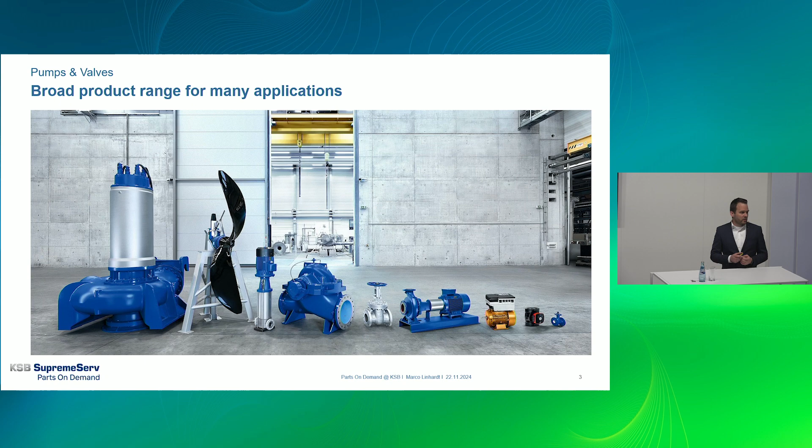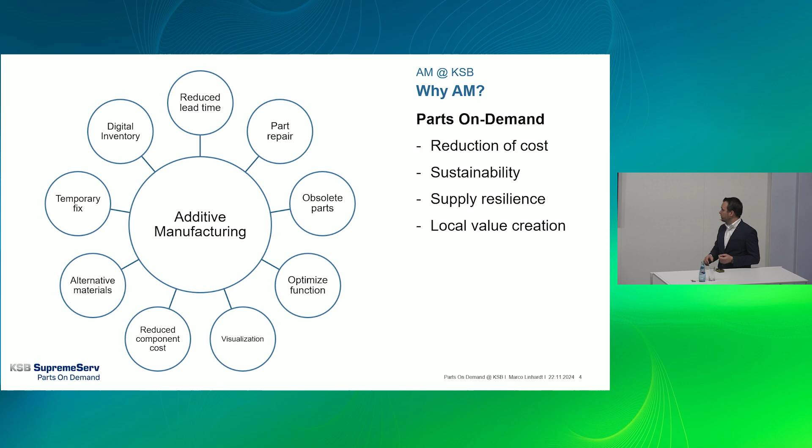We also have a foundry, and in the foundry we have a division for additive manufacturing. What we do is additive manufacturing. Of course we started like everybody else with printing prototypes and spare parts, but additive has so much more potential, like optimizing your parts and products, or even designing parts that could only be done additively to improve your products. I will guide you through some examples we did in the recent weeks.

That's us. We have more than 20 years experience in powder bed fusion. Right now we have five machines: 2 EOS M400-4, 3 M290s from EOS, one with a kilowatt N-Light system and one with a kilowatt big spot system. We started with printing in 316L, but then switched to nickel base alloys like Inconel 625, 718, alloy 59, and so on. We have been the first company worldwide qualified for printing pressure containing parts, and also did the DNV certification for Inconel 625, level 3 for impellers, but are planning to extend the material range as well. Just as a rough estimation, we worked on 8 tons of powder last year.

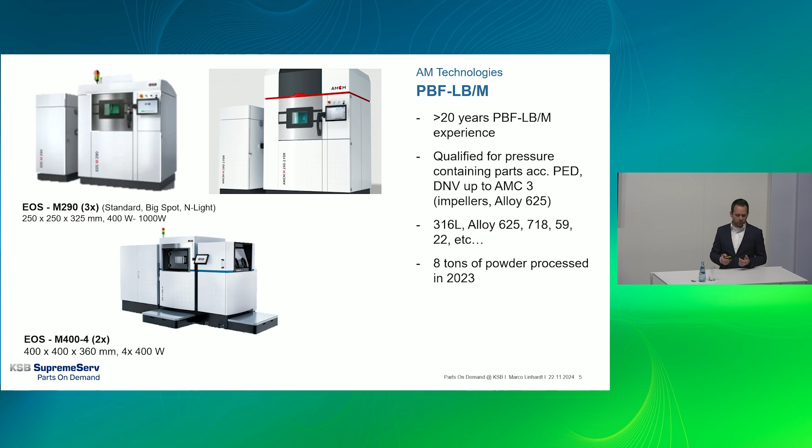This is one of the examples we printed recently, so the topic is obsolete parts. We have a lot of pumps in the field. This is an RPH pump used in the oil and gas business, from 1982, so a very old part, but it's still operating, everybody's happy, but they need a spare part.

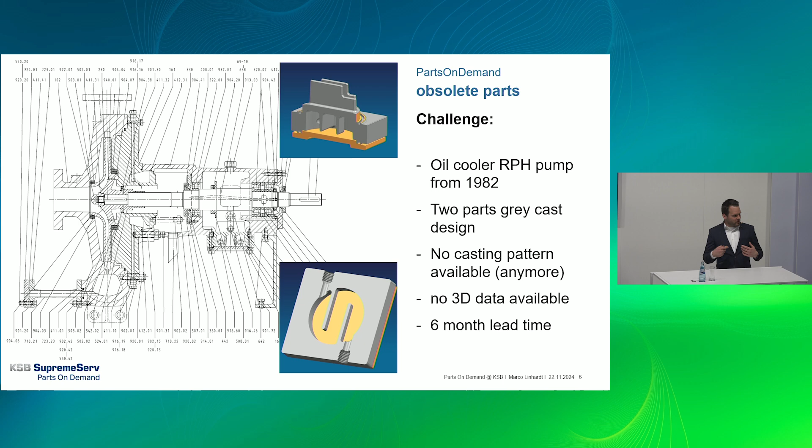The customer asks for an oil cooler that sits in the bearing and cools the oil lubricating the bearings. This formerly was done by casting, 2 parts made from gray cast, and the customer got an offer for the new part with 6 months lead time, which he could not accept. So they asked, can you reduce delivery time please? And as usual, topics like this end up in our department, and we said okay, yes, we could print that cast design, or perhaps we could improve it.

Honestly speaking this is not top-notch engineering, rocket science stuff, but as you can see, we reduced the weight from 8 to nearly 2 kilograms, improved the cooling performance because we have now more surface, we have a wake-free design, so no room for fouling. It's made from 316L because we cannot print gray cast, so that's an upgrade as well.

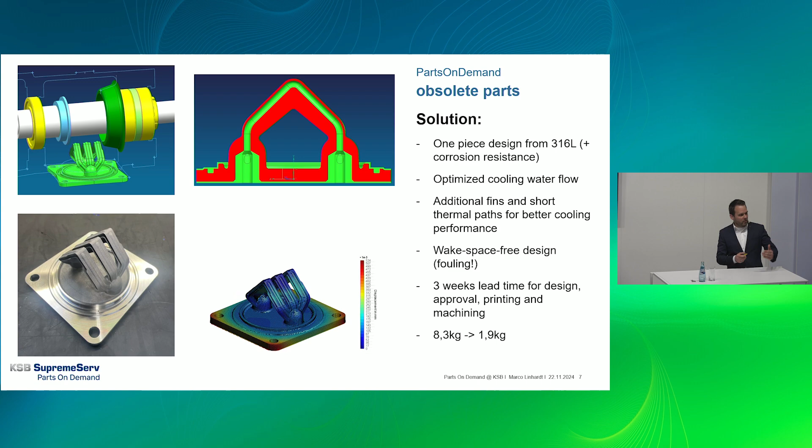The customer was very happy because within 3 weeks we did the clarification, did the redesign, and delivered the part. Of course you could have done more, but a friend of Pareto - 80% success with 20% effort. I think that's a cool example of what you can do with additive - not only deliver the part faster, but also give it some advantage.

Another challenge, just a few weeks ago, was a critical timeline for an impeller. The nuclear power plant in Phillipsburg had a problem with wastewater treatment, and they needed a set of impellers - 2 of them. This was sourced from an external foundry, and when it came to our warehouse, we had to decline the cast because the quality was worse.

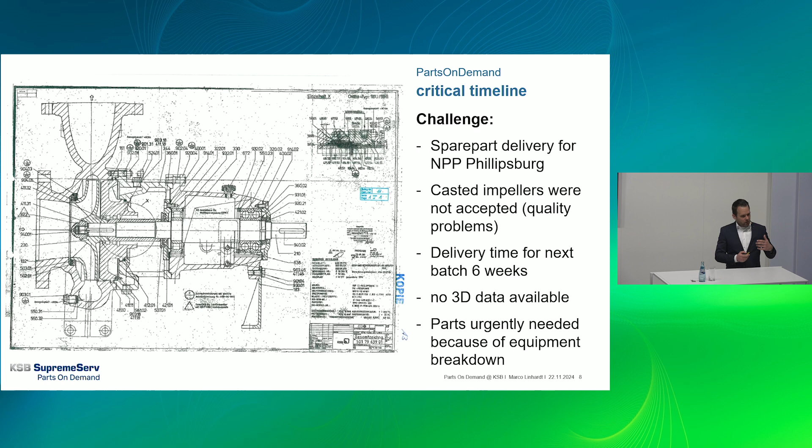The customer got very upset, and the next delivery slot for casting was just too far away. So again they asked, what can you offer? We started - okay, this was a very strange stainless steel material which we cannot print, but we offered: perhaps Inconel 625 does the trick for you. Then we started discussions with the guys from the nuclear power plant, with the TÜV, with the authorities, to prove that Inconel 625 is sufficient for the job, and changed the testing plan from cast to additive manufacturing.

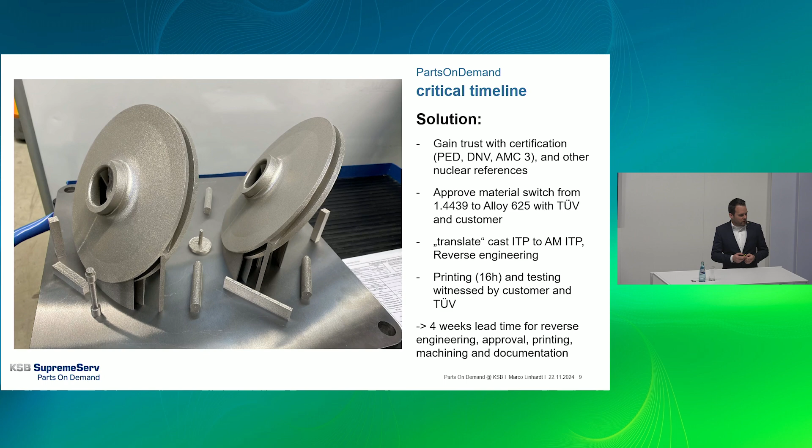We did the reverse engineering, since we only had a very old drawing to get 3D data, and printed the parts with the customer and the TÜV present at our plant, looking at what we did within 16 hours, and then 4 weeks later we delivered the parts. So printing was just a very small section - a lot of paperwork in advance and a lot of testing, because that is a critical application where you need a lot of destructive and non-destructive testing to get your parts delivered.

That is also a cool example from a big oil and gas OEM in Norway. We produced 2 sets of impellers, so 14 impellers in total. They were formerly done from duplex steel, and they wanted to increase material performance, so we switched to Inconel 625 and printed these according to DNV AMC level 3.

14 impellers, 400 millimeter diameter. That is quite big for our machines. And of course, also with a shorter lead time than sourcing cast material.

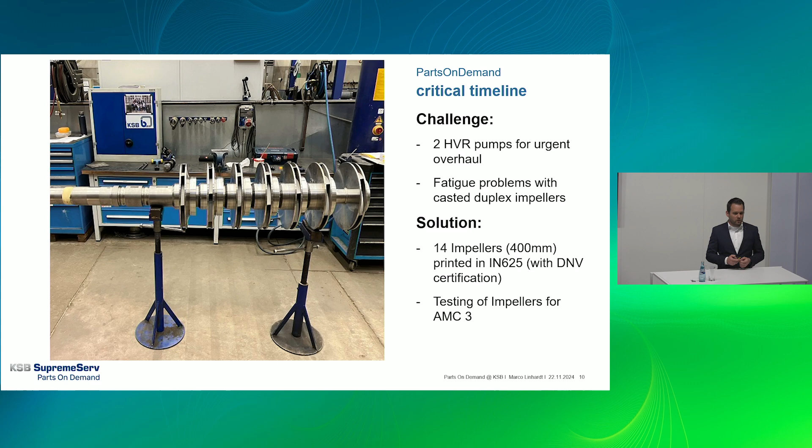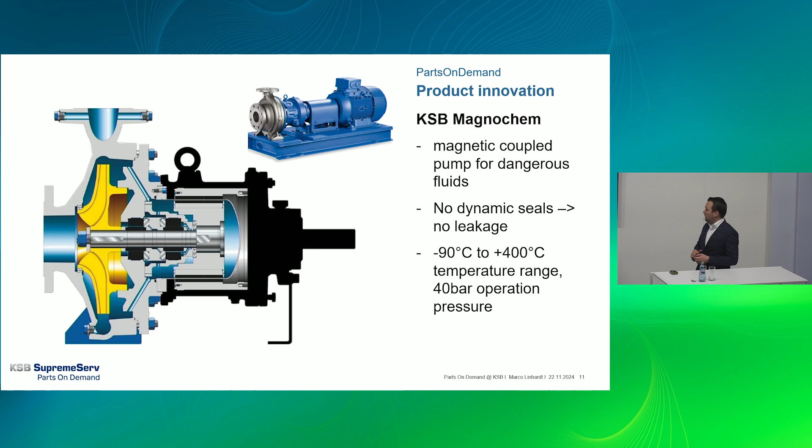And the problem is when the customer has metallic particles in his fluids, they will just collect up by this magnetic rotor on the inside, and then you have a so-called can opener. And after some revolutions, it makes plop, and your explosive, dangerous fluid is basically everywhere, and that's not a good thing. And that is why we designed a double-walled containment shroud.

So basically, it's a containment shroud, and on the outer diameter, you have a lot of channels. They have 0.8 millimeter diameter, 0.3 millimeter wall thickness, and you draw a vacuum in these channels, and as soon as the inner or the outer rotor damages the channels or the inside, the vacuum will drop, the pump will remain safe, so you can shut it down safely, but you have no leakage.

And the big benefit is the design of that structure reduces the eddy current losses due to the rotating magnetic field to a level of the standard design or even below. That means, of course, we save energy from the electric motor, but on the other hand, we don't heat up the fluid in the rotor chamber and avoid vaporizing fluids in the bearings, which is a big benefit.

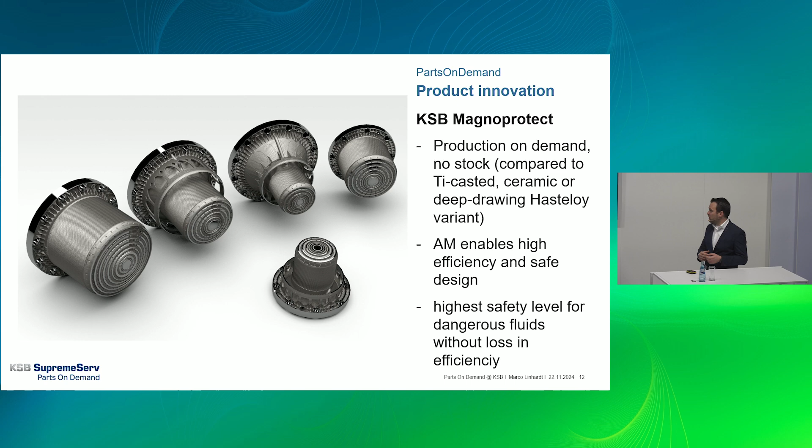So, as a short conclusion, what we see is spare part demands are ramping up, especially for obsolete parts. And what we also see from the industry is that our partners don't want to buy a huge pile of spare parts when they buy the pump. Because right now they have the situation that when you need a spare part, you sometimes have to wait 6 to 8 months for this part, and nobody can wait 6 to 8 months to get a spare part.

And this is why he orders so many parts and has them on stock, knowing that perhaps he will never need these parts. So it might happen that 40 years later, he scraps the pump and scraps new spare parts, and that's of course a lot of money wasted. You need the storage, you need to buy it, that's capital you cannot work with.

And that is not necessary because with additive manufacturing, we have the opportunity to provide these parts on short notice. The challenge is the clarification in advance. So like you saw with the nuclear power plant example, it was 4 weeks of paperwork to get these parts printed within 16 hours. So if you clarify everything in advance, have 3D data available, have working plans available, have done support structures, process simulation, and have just one number ready for order, you can decrease delivery time even further.